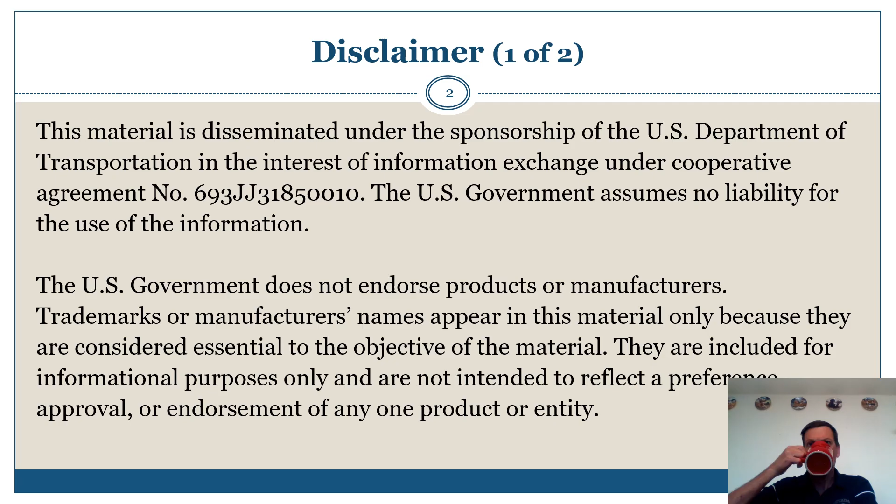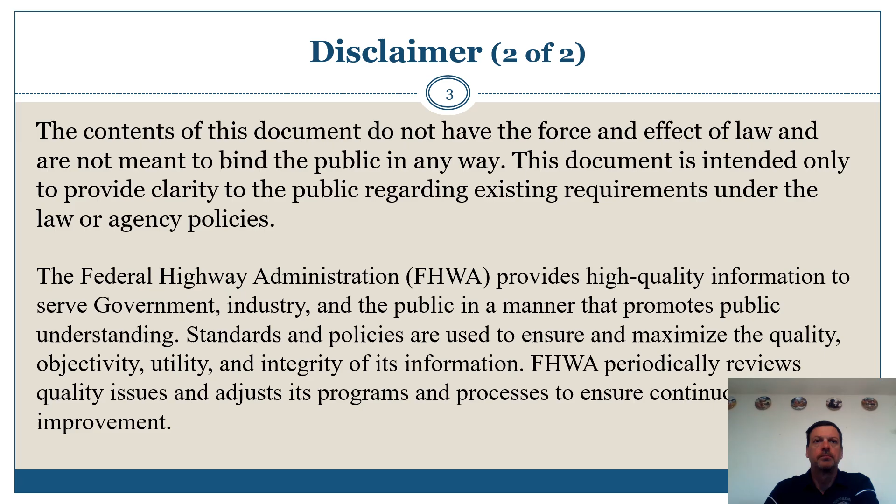Okay, so the outline of the presentation is I'm going to talk a little bit about the cooperative agreement itself and some products, then the Intelligent Construction Equipment Report, as well as some other products that have been developed associated with non-destructive testing technologies that are used in quality assurance programs that FHWA has been working on, and then wrap things up.

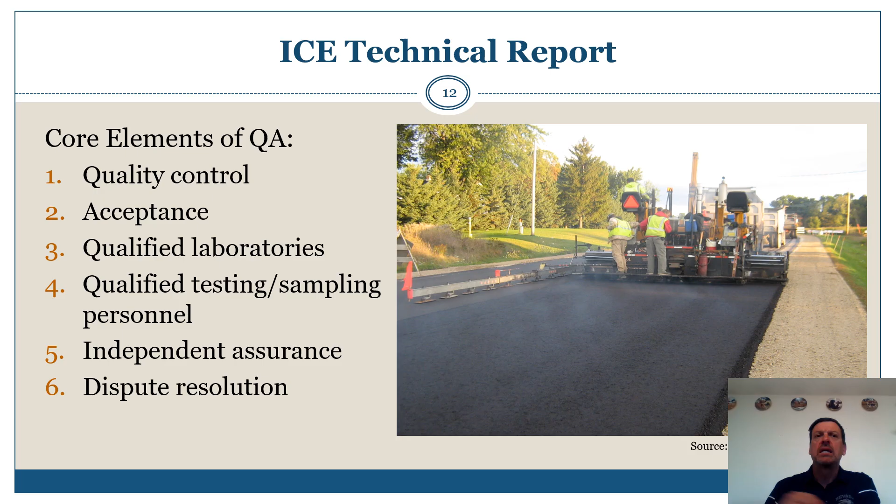And so the first thing we want to do is make sure we get quality control and process control clearly defined. And if you look at the TRB, there's a TRB circular on the definitions, and these are consistent with that, as well as the Code of Federal Regulations.

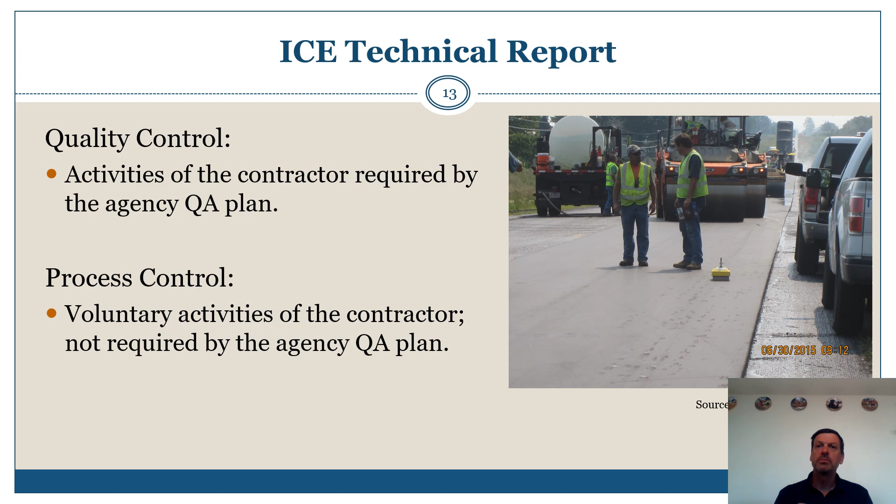Quality control is activities that the contractor does, and they're required by the agency in the quality assurance specification or plan. It's really important to note that these are required and have to be reported. Now, contractors will also do process control. Process control activities would be testing and inspection and so forth that are not required by contract. That's the differentiator that's really important to recognize. Quality control is required; it has to be reported. Process control are things the contractor does on their own, to make sure that the quality control requirements and the acceptance requirements are fulfilled.

Some of the quality assurance challenges when using intelligent construction equipment for acceptance and payment come with validation, and it's really about using the contractor's test results for acceptance. This equipment is maybe mounted on a piece of equipment that a contractor is using, so the contractor is generating the data, and if you recall, the Code of Federal Regulations requires that if an agency is going to use the contractor's data as its basis for acceptance payment, then it has to be validated.

What that requires is that the agency, the DOT for example, would go out and do some testing that could be used to verify that the contractor's data was valid. That's the validation process. For example, with mat density, a contractor might take 10 nuclear density measurements per lot, or 10 cores, and the DOT may take say 3 density measurements, whether by nuclear method or cores, and then those data are put through F&T tests to make sure they have similar means and similar variability. Then we can say they come from the same population, and the agency can use the contractor data in making its decisions on payment.

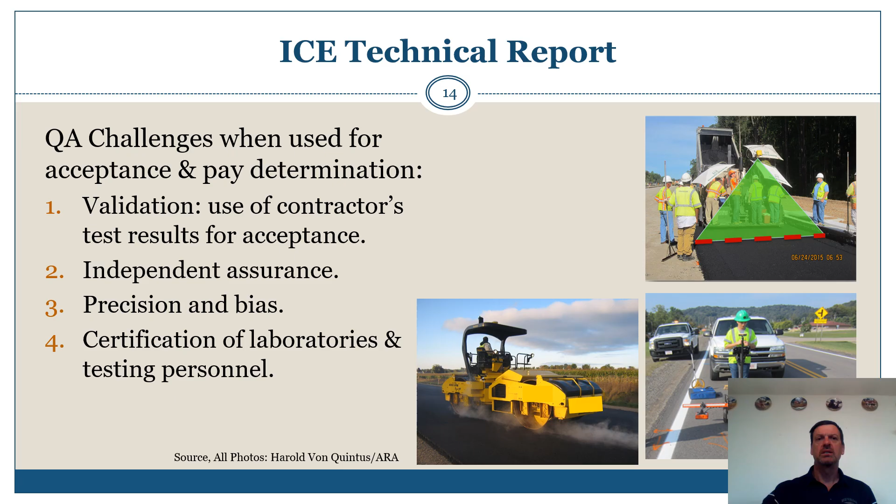We don't have precision bias statements for the actual test methods. Thankfully, we have some new test methods, and precision bias work is ongoing, but we don't have them for each of these ICE technologies. And then, of course, there's certification for laboratories, equipment, and testing personnel.

With any new technology, there are basically 5 steps to complete deployment. You start with the development of a concept, that's step 1. The next step is to develop prototype equipment, then conduct field demonstration - in this example field demonstrations, but it could be field or lab. Once those demonstrations have been done, you can make tweaks to your tools, and then go ahead and get to the pilot or first application of the technology on projects. You repeat that process again, work out some of the things that need to be worked out, and ultimately get to the point where you can develop a specification and standards for full deployment.

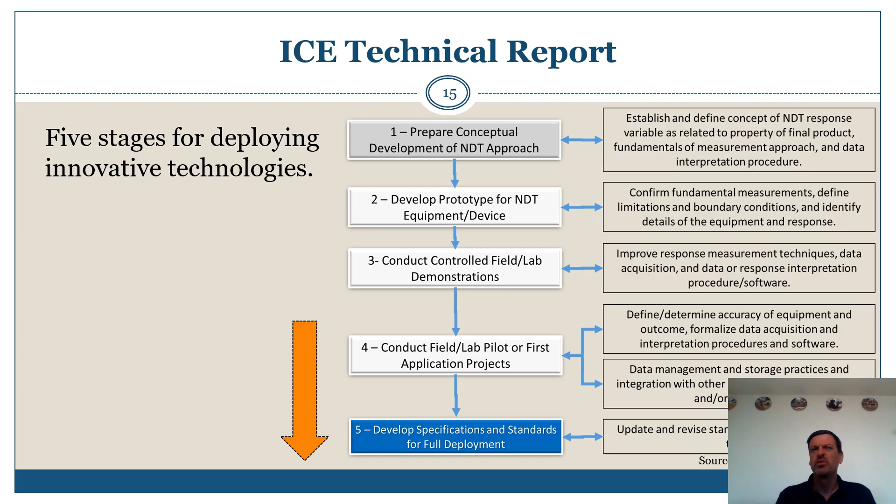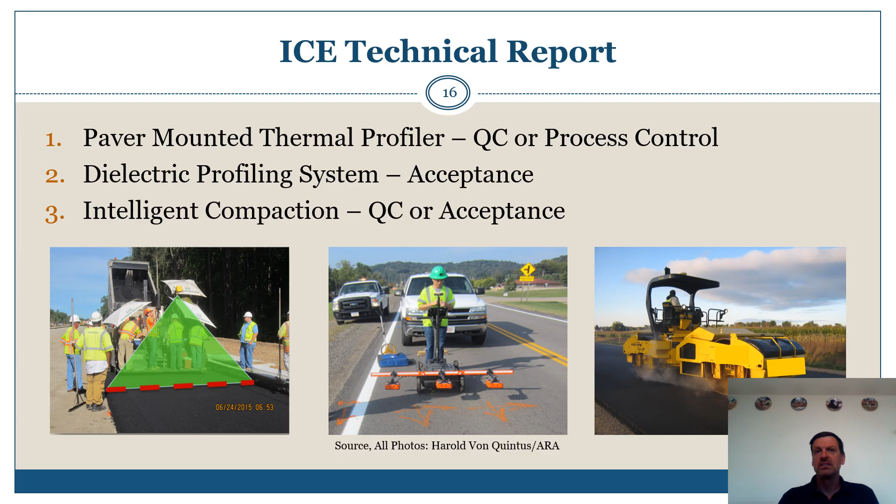With the ICE technology we're going to talk about today, we're really between stages 3 and 5, depending on the technology. We're going to talk about paver-mounted thermal profilers, which thermal imaging folks will call it, dielectric profiling systems or DPS, and intelligent compaction. Following each of these there are some suggested uses for them, and we'll talk about QC and acceptance and some of the challenges, or some of the things that are not challenges, associated with using them for those applications in the webinar.

If we start with intelligent compaction, there's a recently published AASHTO standard, R111. With intelligent compaction, we basically get an estimate of the stiffness or the response of the forces induced by a vibratory roller into the mat. There have been efforts to correlate that to density. What happens is as you make multiple passes with your roller, the pavement structure becomes stiffer, and the idea is as that stiffness increases, you could correlate that stiffness with density. It's been very, very difficult to do that - there are multiple things that affect density.

Basically there's an accelerometer on the vibratory compactor. With that, and a GPS mounted on the compactor, you have spatial information - where is the roller, where's it been on the mat. And again, you get the response from the load that's induced, and you can calculate a stiffness. So as I said, there have been some challenges in correlating that with density.

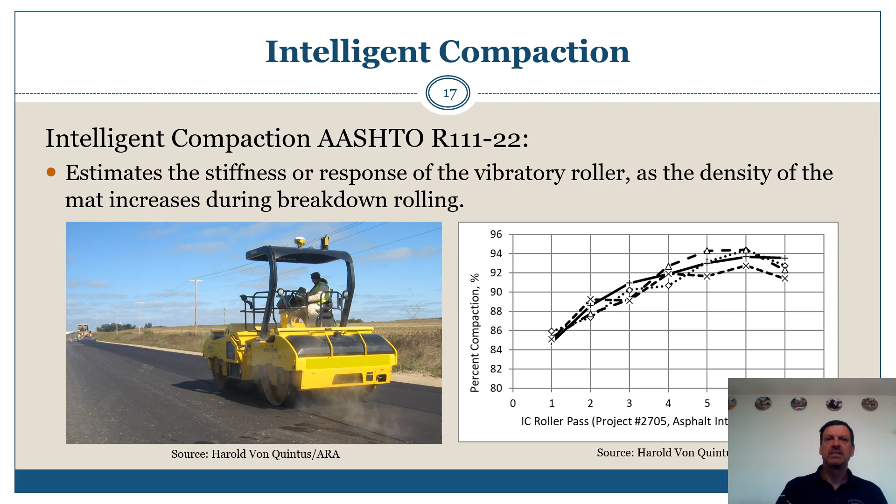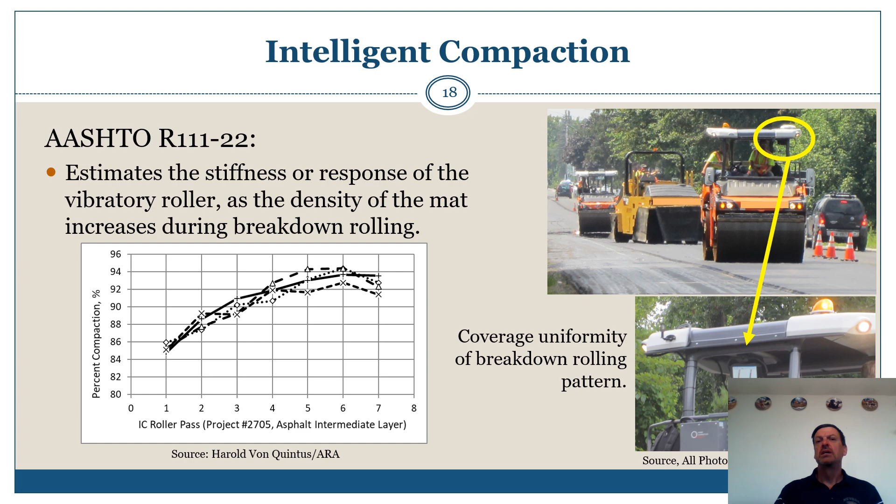This just shows the GPS, and on the rollers the operators have a screen. On that screen they can see it's color-coded, kind of like a heat map. It shows the number of passes they've made on the mat, so they can assure they're getting uniform coverage.

That's a very important aspect of intelligent compaction. Challenges with using it: the agency's not going to go run a compactor after the contractor's done it, so you don't have the validation step, and it really can't be used for payment. There's also some things associated with independent assurance that the loop hasn't been closed on, as well as precision and bias.

We have precision and bias statements with most test methods. You have a precision and bias statement, but we don't have those for these test methods, although there's some ongoing work on that front for some of them. And of course, the training and certification, or fulfilling the qualified technician requirement, is not fulfilled at this point.

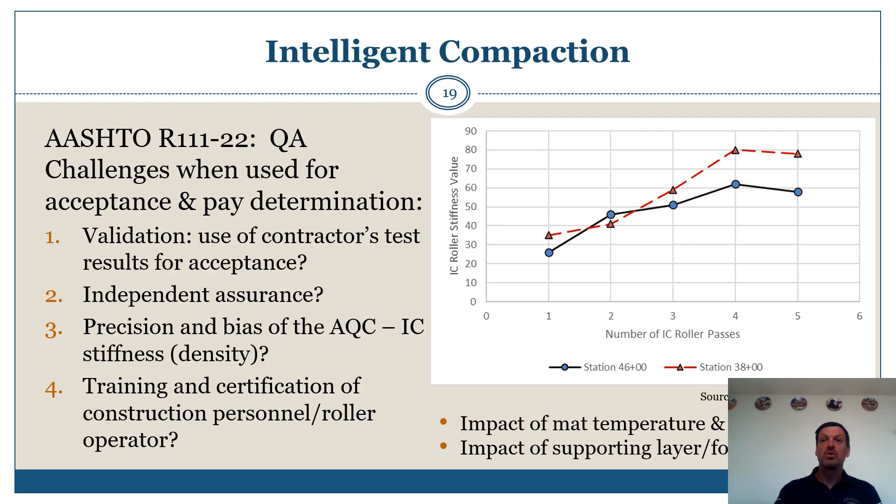Part of the challenge with intelligent compaction is the stiffness of the mat changes as a function of temperature for hot mix. In that process, the density may not be changing, and that's why there's been such a challenge with correlating the stiffness response from the compactor with density. Another reason is that the response is the response of the entire structure, not just the hot mix layer that's been put on top. So that's really the driver as to why we're unable to correlate density well.

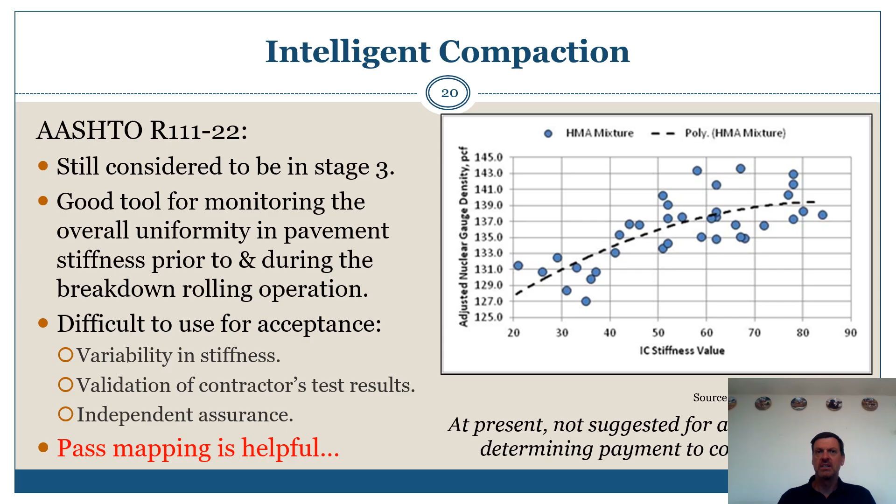So this is still a technology that's considered to be at stage 3. It's a great tool for monitoring number of passes and mapping to make sure good coverage has been completed. It's also a tool to identify, prior to placing your surface lift or the next lift of hot mix, weak spots, utilities, all those kinds of things—variability in the existing mat before you even pave on it.

The next technology I'm going to talk about is a paver-mounted thermal profiler. There's an AASHTO standard for this, AASHTO R110. Basically what we get with the thermal profiler is an estimate of the surface temperature of the mat.

Some work done by the University of Washington—or really by the Washington State DOT, with UW helping them—found that if you have excess ranges or variability in your mat temperature, you're going to have variability in your mat density. That work was done, I think, in the late 90s, if my memory serves me right. So it's not something new, but this is some technology that can help identify the potential for that.

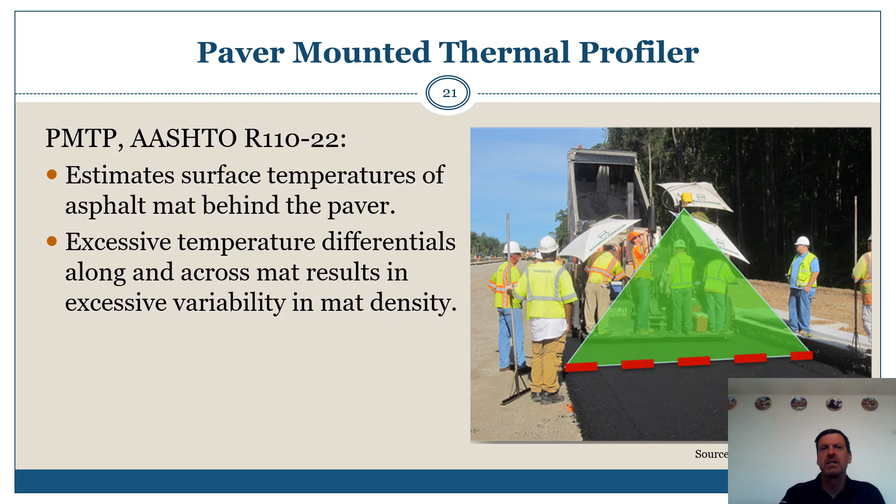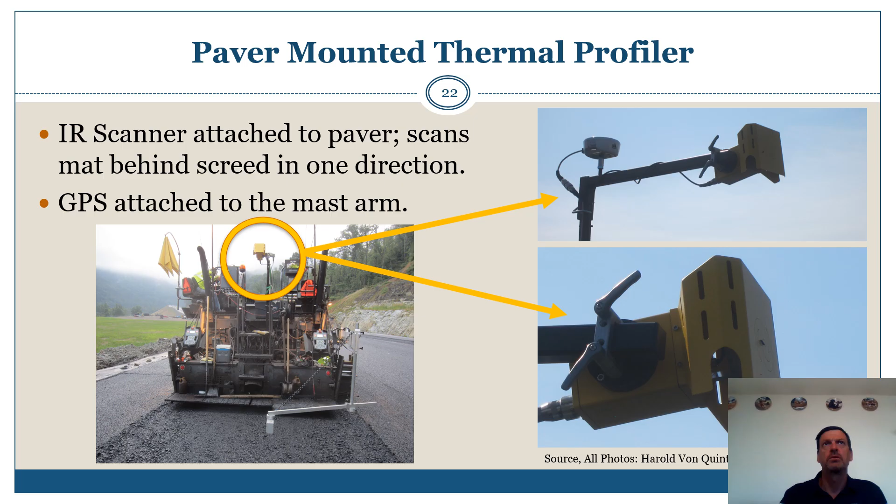Again, it's very simple hardware. On a paver, you basically have a GPS mounted on the paver, and then you have an IR scanner. There are different ways of mounting them. Today, when you buy a new paver, it's not uncommon that these are installed by the factory—they're not sort of aftermarket bolt-ons.

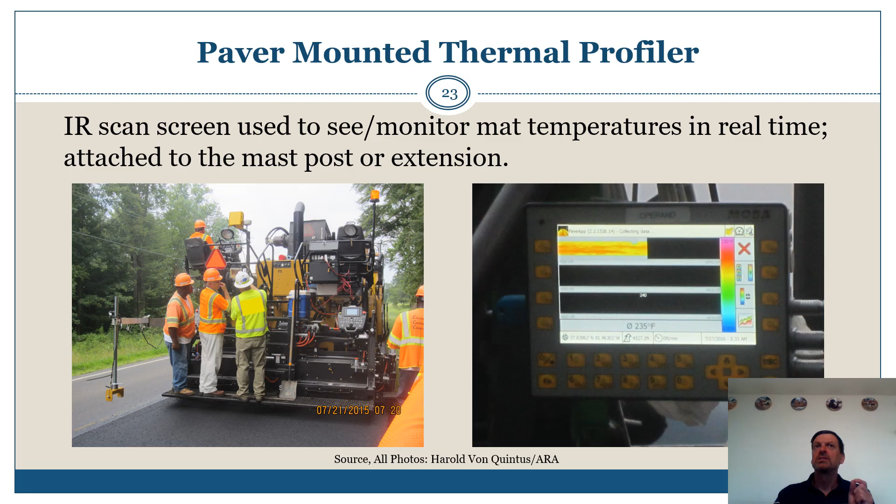The systems all have different manufacturers, and they all have, just like the monitor on the roller, a display so the operator can see the pass coverage. There's a monitor that shows the temperature, the thermal profile, as the paver goes down the road. It's a heat map, color coded, as you see on the right. In this example, the color goes from low temperature blue, and the highest temperatures are up in the purple range. What's really important is not just what the temperature is, but also the uniformity of the temperature—the more consistent the color on the map, the more consistent the mat temperature.

This is just an example of some of the hardware. Again, it's not much to it—it's a simple bolt-on, if you will.

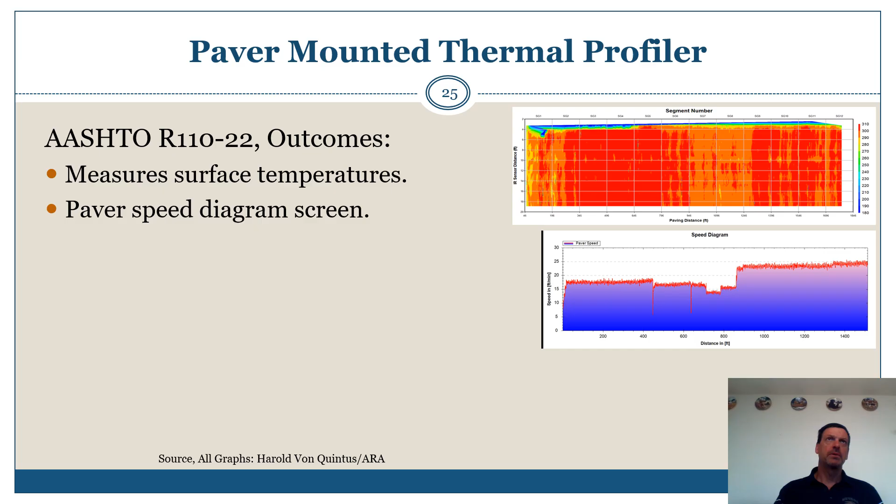This tells you about the operation of the paver, and you can identify stops with this also. We've all been trained that we want our paving operations up and running at a constant pace, so we have a balanced operation and we're feeding enough material to the paver so it never runs dry, and we're going slow enough so that with the compaction equipment we have, we've got adequate opportunity to get it compacted before it cools. Again, this can help operators understand the influence of speed changes on their operations, and ultimately density.

There's basically a histogram, what they call a class diagram screen. You get a distribution of the percentage, or the count which can be converted into a percentage, of temperature observations that are in certain ranges. In this example, you see we've got a handful down at 250. There are about a little over 20% at 270, about 75% at 290, and then there are a few at 310 degrees. So finally, again, we get the map that shows where stops occurred.

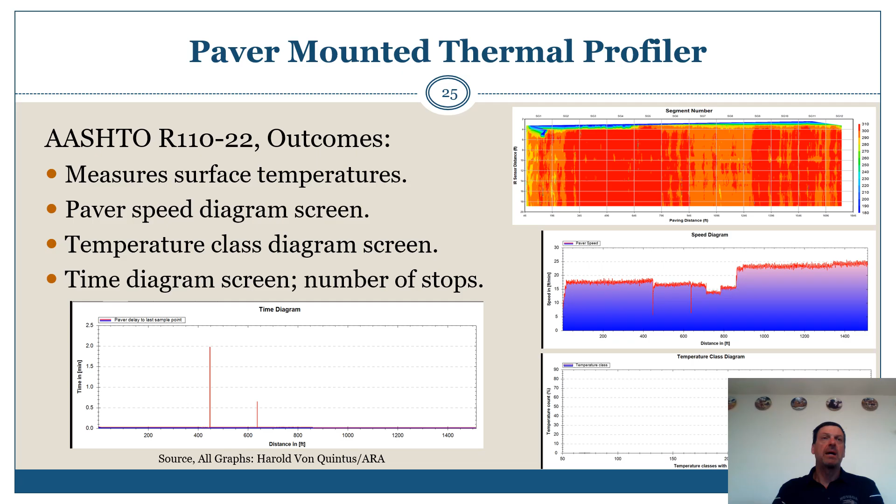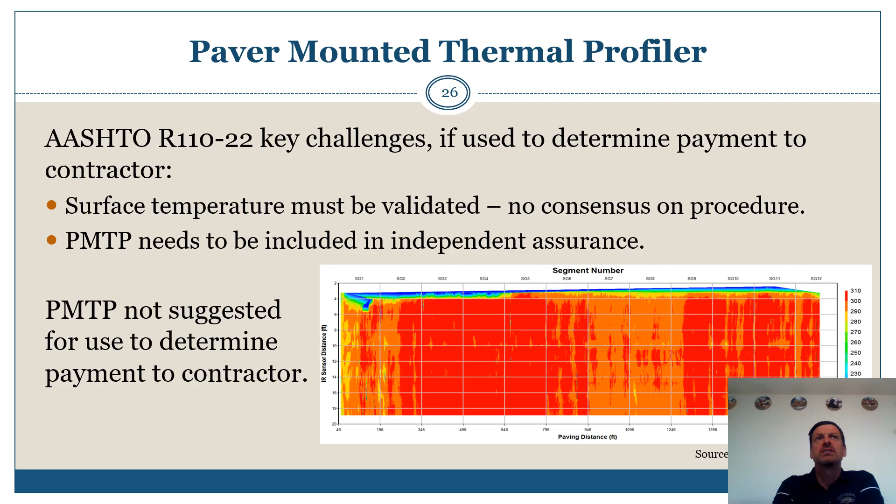The challenges with implementing this technology is the validation. Again, the IR sensor is mounted on a contractor's paver. So for the agency to go ahead and get a heat map, they'd have to do the same thing, right? And so how do they independently do that? That's the real challenge. If they don't get that data, then you can't use it for the verification and validation processes. And so there's really no consensus right now on how to get that data or validate it. We also have some needs associated with independent assurance requirements, and therefore it's not suggested for use for contractor payment at the present.

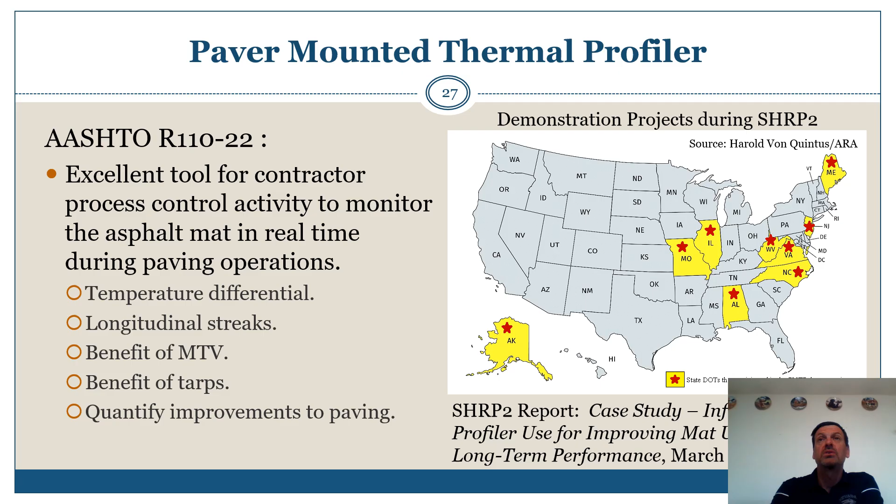The tool was really brought to light through a SHRP2 project that Harold was very much involved in. There's some data we're going to share that illustrates the benefits of this, associated with identifying differentials in temperature, longitudinal streaks. Depending on your paver setup, you can sometimes have streaks in your mat that are at different temperatures. The benefits of using material transfer vehicles, the benefits of tarping, the influence of how you load your trucks, and all that stuff can be used by contractors and agencies to improve the consistency and quality of the mat.

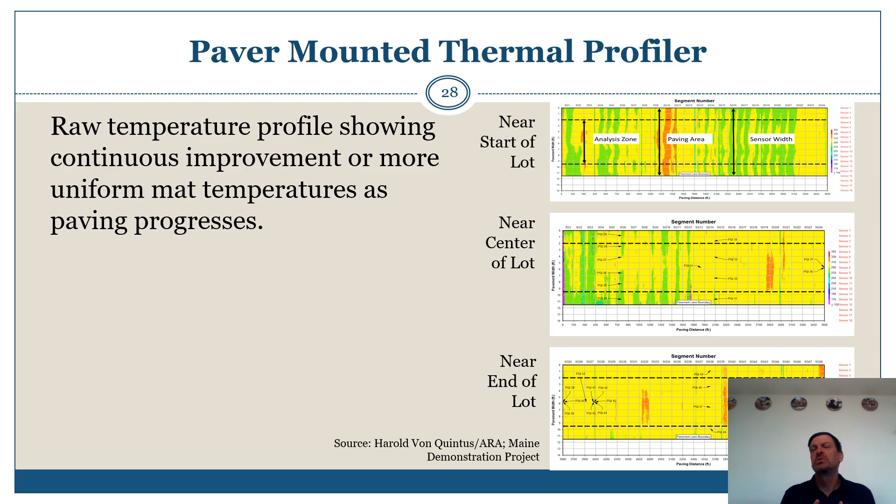This is profile data from a project, and what I want to show here is the heat map. This is the start of a lot, and you see multiple colors here. This is near the center of the lot. We're getting more and more yellow, less orange, less green - again, those are the extremes. Near the end of the lot, it's almost all yellow with a little bit of orange. So this is a transition from relatively high variability in mat temperature to reduced variability in mat temperature, which will lead to more consistent density, which is obviously very important.

This is an example of a contractor using field data, getting it back to the lab in a timely fashion, essentially real time, so they know what's going on at the plant, and the quality control folks can help the plant operations and field folks be successful by using the data.

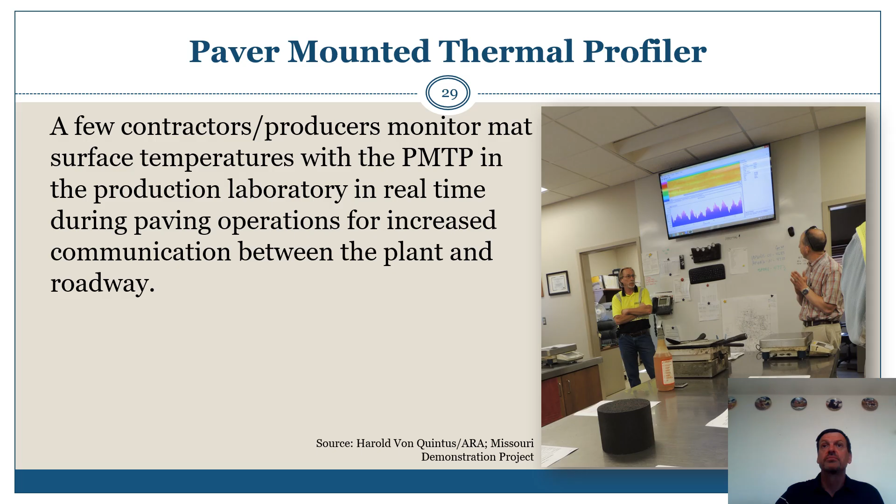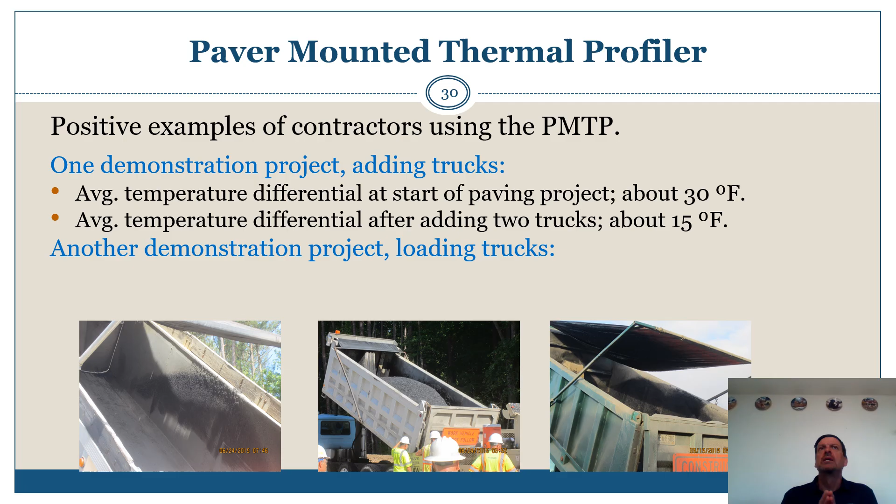So I mentioned a couple of examples on the demonstration project associated with the SHRP2 project. One had to do with trucking, and I talked a little about balancing operations. We got consistent operations, and on one of the demonstration projects, they added some trucks, and by adding trucks they significantly reduced what are called temperature differentials - I'll talk about quantifying those in a minute. So the range of temperatures on the mat went from about 30 degrees Fahrenheit down to about 15 degrees Fahrenheit. Another example was associated with loading trucks - loading in one drop versus multiple drops, with the multiple drop technique having more consistent temperatures of your mix on the mat.

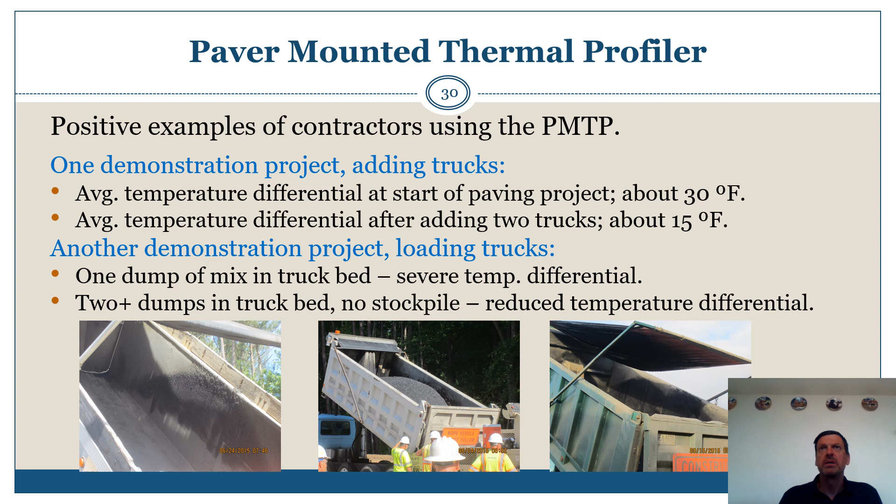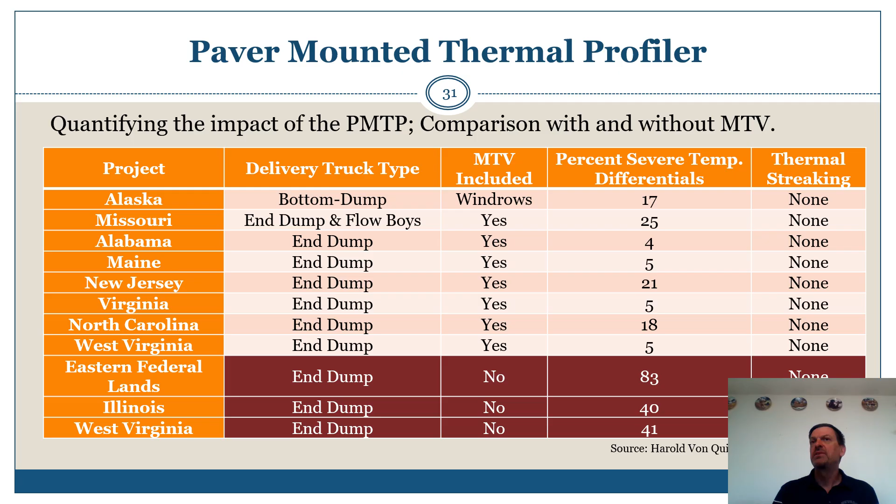This is a project there where there were bottom dumps and a windrow. When you have a windrow, you have to use a windrow elevator or pickup machine or a coal cow, pick your terminology, to get the mix into the paver. On that project, and there's only one of them, so it's a little hard to make any real strong comparison here, but it does illustrate that even with bottom dumps and windrows, not an MTV, you can still pave and have mats with a relatively low percentage of severe temperature differentials, which is illustrated. So really what that says to me is that if you're doing the right things in your paving operations and you're using the right tools, you don't necessarily have to have an MTV to get consistent mat temperatures.

So with the thermal mounted, or the paver mounted thermal profiler, it's not used for acceptance. It's again a great tool for monitoring paving operations and making corrective action. There's so many examples of that, and I'll wrap up with some of that in the end.

So some of the challenges are obviously with the laboratory and personnel qualifications. Think about these lab qualifications. If you pick a lab test, say theoretical maximum specific gravity, you've got a pycnometer and a shaker table, and you've got a manometer, and you have balances that you use, and you have a calibration service come in, and they verify the performance of the equipment and give you records and all that good stuff. Well, that's not going on out in the field with this equipment. This equipment is mounted on a paver, and so we just don't have some of the systems in place to make sure we meet the independent assurance in laboratory, what would traditionally have been called laboratory and personnel qualification requirements. Because you have to make sure that the sensors are working properly, and you have to go through a process of calibrating them and then verifying them at a given frequency. Again, that's just not really worked out just yet.

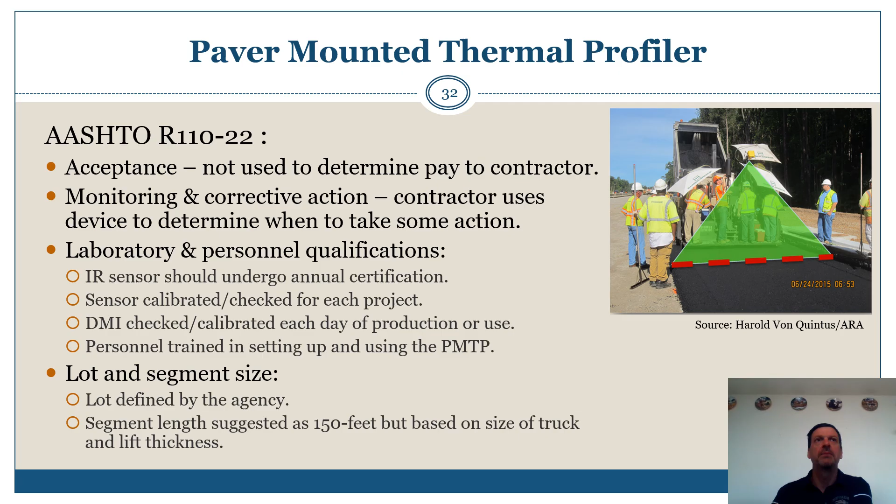What was an outcome of the SHRP 2 project was a recommendation on defining segments, as the distance that a single truck covers. The reason for this is when you're looking at this data from truck to truck, you're not looking within a truck. You're obviously going to see more, you have the potential to see more variability. But you're not really looking at the control within a truck, which really matters, assuming that the plant produces a mix at the same temperature and all that good stuff and gets loaded the same. So that was one of the recommendations.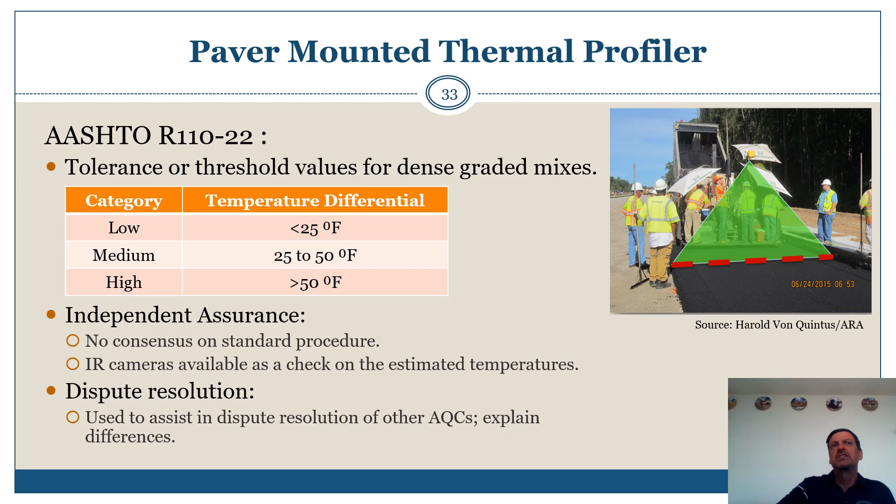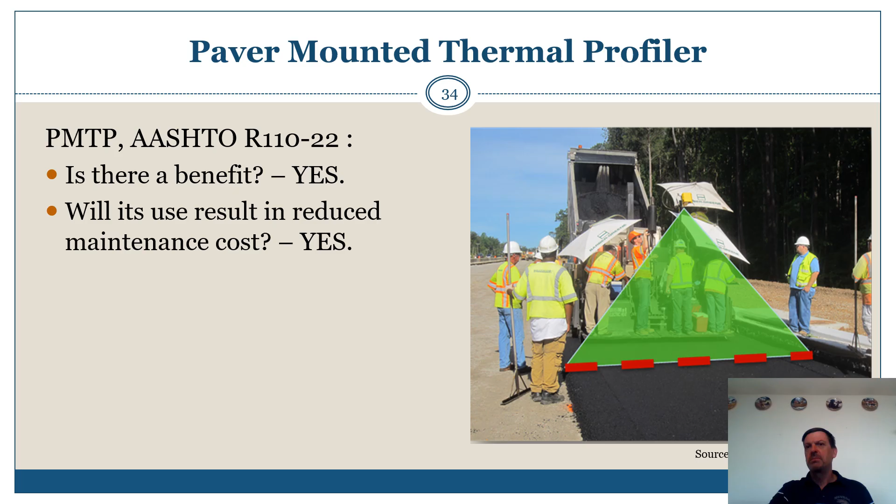And I already talked about the independent assurance items, and then finally the dispute resolution. Again, this is a tool that can be used to help dispute resolution. So the questions posed, is there benefit? Obviously, yes. Will it result in reduced maintenance costs, more consistent mats, all that good stuff? The answers are yes, yes, yes. And then a follow-up question is, why aren't more contractors using them?

As there are some contractors, I should first start by saying that there are some contractors that are using them and using them successfully.

The other piece of that is contractors have businesses, and so if they're going to make an investment in this technology, they've got to buy the equipment. They've got to have people monitoring the data constantly, putting all that data up in the cloud, storing it, analyzing it, and then using it for training. That all costs money. So if there's not an incentive to do that, some contractors may not do it.

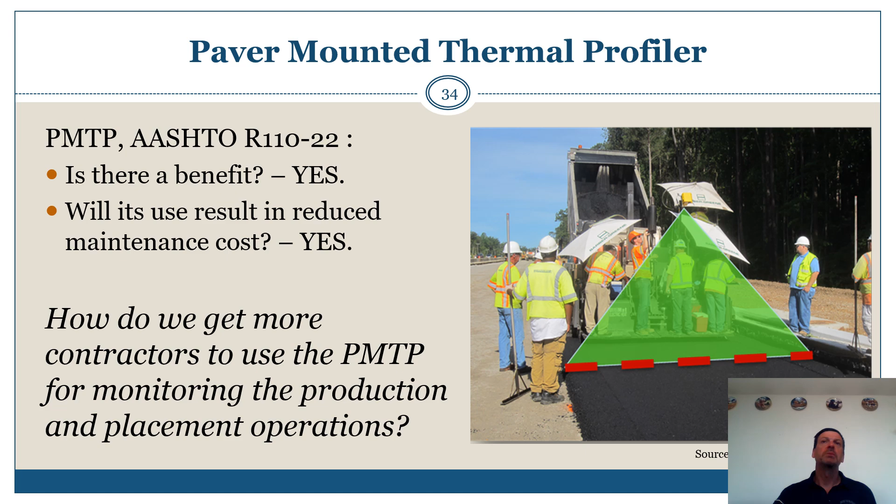The next technology I'm going to talk about is a dielectric profiling system, or DPS. Some of you may have heard it referred to as GPR, ground penetrating radar.

Basically what the DPS is, there's an example in the picture on the right. What's typically being done today is you've got a cart with 3 sensors mounted on it, the orange boxes on the cart, and the cart is walked down the mat.

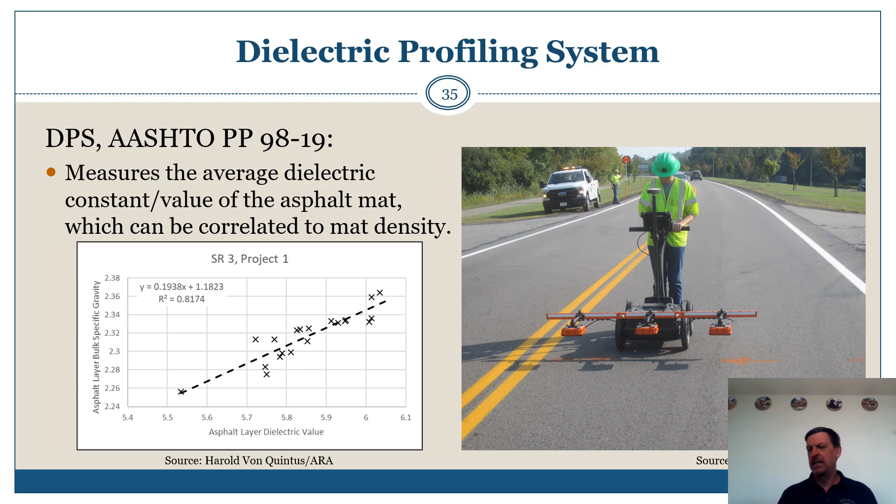Each of those sensors gives you a dielectric constant. We don't have time to get into the details, but essentially you get a dielectric constant from each sensor, and then you can correlate that dielectric constant with density, with bulk specific gravity, with percent compaction, or with percent air voids. It doesn't matter which one you want. The point is, you get a dielectric constant, and then you correlate that with density.

One of the really good things about this is you can get full mat coverage. So rather than taking 10 density measurements with a nuclear gauge, or the state taking 3 or 10 cores and 3 cores for the contractor and state, or 10 nukes and 3 nukes, you can get complete coverage. So you can get a measure of conformance rather than an estimate.

When we take a limited number of samples, most specifications take a limited number of samples, say the contractor taking 10, agency taking 3. The F&T tests are then used to verify that the means and variability of the data are similar. If they are, then the contractor data, which is a bigger data set, is typically used to calculate a percent within limits, which is an estimate of the percent within limits based on a sample, and it has some risk associated with it.

Really, all that is eliminated if you get complete mat coverage. At that point you know everything about the mat, and all you have to do is look for how much doesn't conform. There's no estimating from a sample, which again has some risk associated with it.

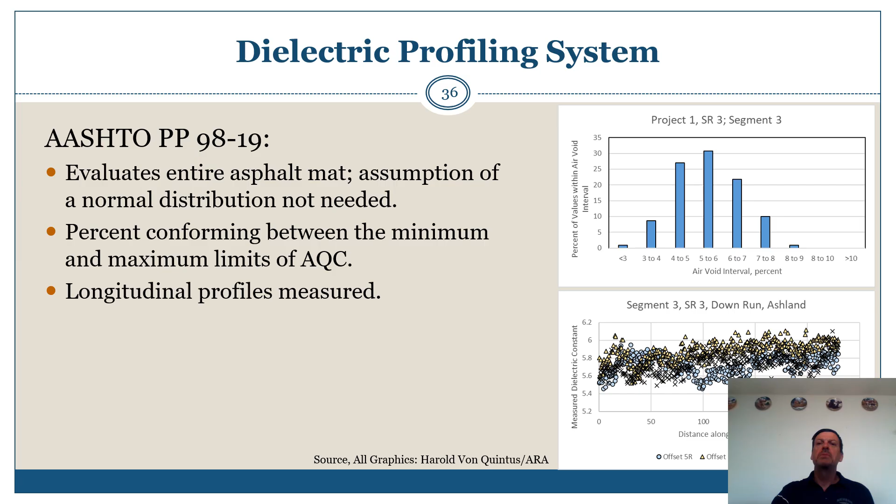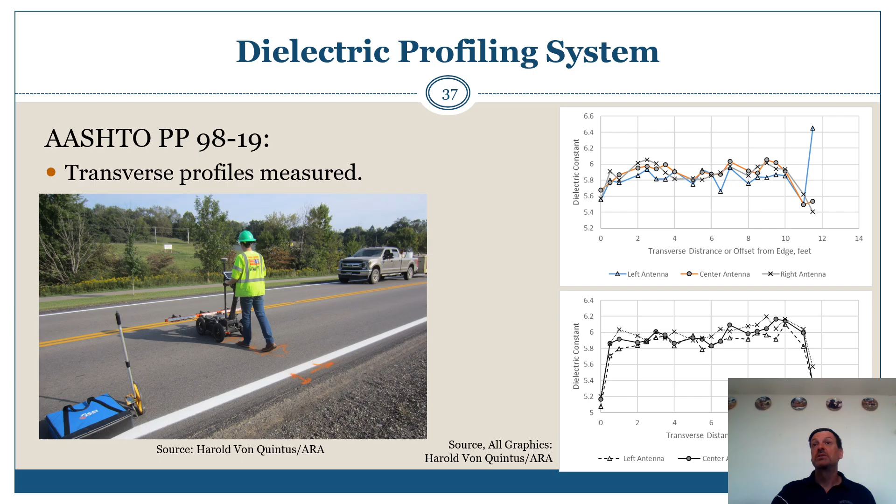You can also use it to measure density transversely. Again, this is a really good tool for pavers, for paving operations, to understand how the way they've got their paver set up and how they're operating it can influence density, as well as the compaction process.

This slide shows correlations between dielectric constant. On the x-axis you have asphalt layer dielectric value. On the y-axis you've got bulk specific gravity, and with a theoretical maximum specific gravity you could turn that into density or air voids.

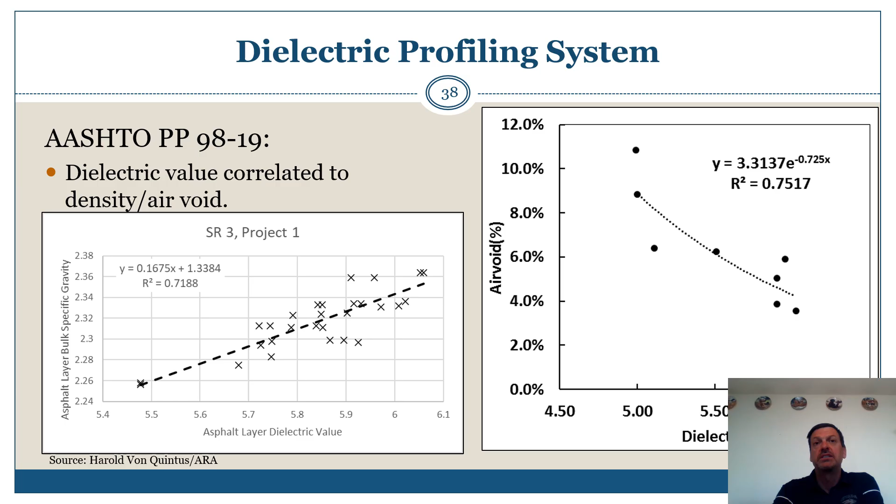You see the correlations on these plots in the 0.7 to 0.75 range, and these are basically from correlating dielectric values from the GPR or DPS to field cores.

Now there is a lot of variability that can occur in production. So you have temperature gradients, for example. You have inconsistency in mix. You have the distribution of the mix with the paver and how that could influence all of this. At the end of the day, there's a fair amount of variability in the field that doesn't exist in the lab, and that became an important future observation for future use.

So the things that influence the dielectric in the field are whether or not the mat has any moisture on it. It has to be dry. The dielectric is significantly influenced by moisture, so the mat has to be dry. It's not real-time density, it's when the mat's dry, but in most operations it's pretty quick after the mat has been finished compacted. And then the thickness of the mat, as well as the gradient of the density in the mat itself.

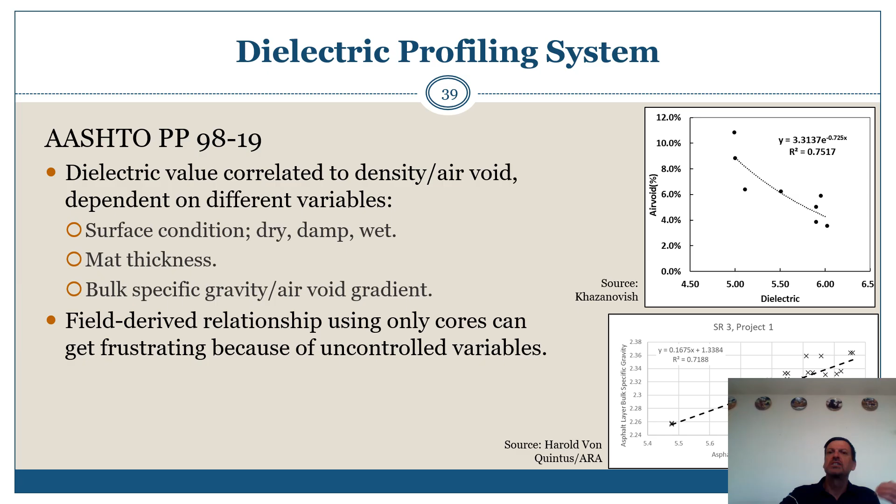So the variability associated with that has created some challenges with getting really good correlations—getting above about a 0.75. Now there's some rare cases where it's better than that.

So what has been learned—there's been a lot of work done associated with the pool fund study that Minnesota is the lead on. There's a DPS ETG, and I think there are well over 20, close to 30 states that are participating. One of the outcomes of that is using laboratory compacted specimens to develop the correlation between density or air voids and dielectric value, rather than field cores, to address the fact that there's so much more variability in the field when you're really trying to get an indication of the density.

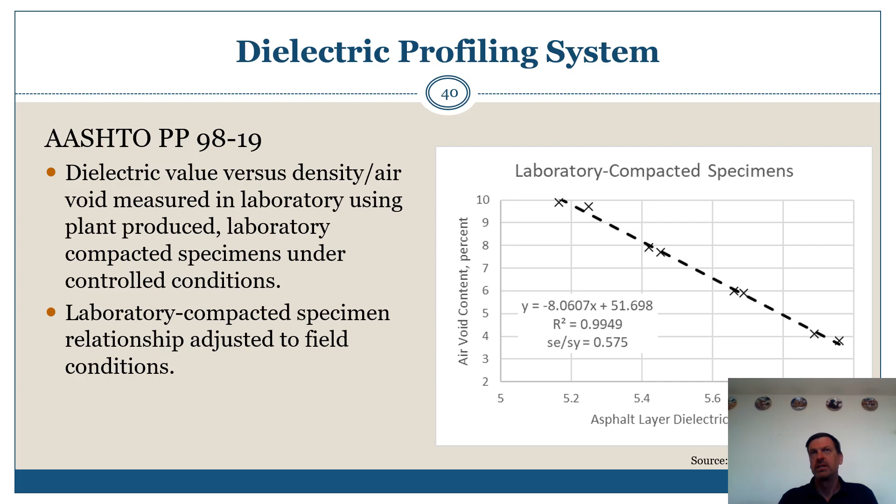So we see here an example of a correlation that's 0.99—fantastic correlation, right? This is what's being used today or promoted today. This is an example of some data with cores that were measured, so it's volumetric air voids, cores that were calculated using bulk density and RICE, and then lab compacted specimens. And you see pretty good correlations among them, again R-squared values that are very, very high.

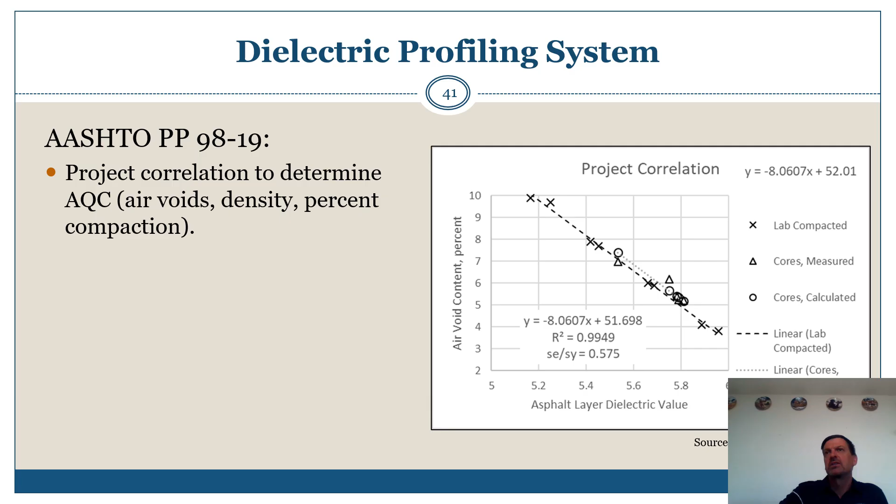But most folks have begun to move to using lab specimens to eliminate those other sources of variability and get better correlations. So there's a provisional standard for the DPS.

Obviously there's some challenges when using it associated with acceptance and payment. Again, this is one of those where if the contractor goes out there and runs the DPS over the mat, gets all the data, the agency has to use some method to verify that, whether it's cores or running a DPS on a portion of what the contractor ran it on. So it's not recommended right now for use for acceptance because of that process.

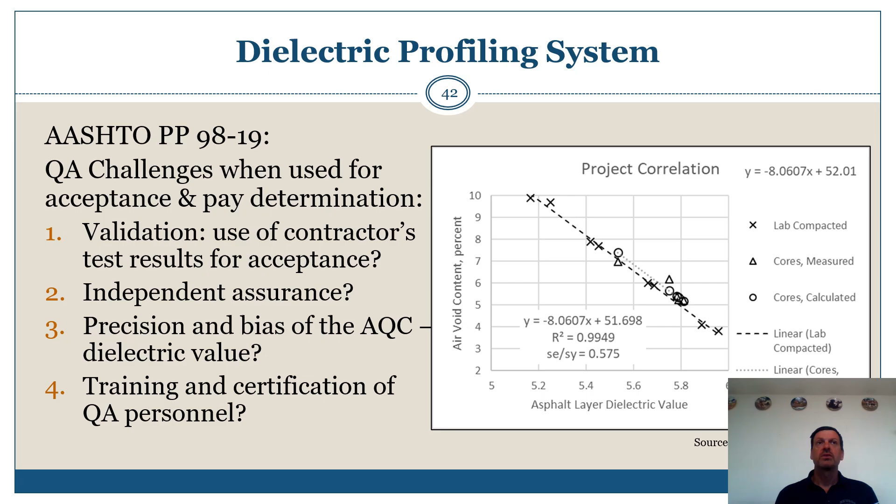We still have some things on the independent assurance to get worked out. There's work going on with precision and bias, which is really good. And then again, training and certification for quality assurance personnel is still something that's sort of hanging out there. A lot of this is being worked on in that pool fund study. I want to underscore all the really good work that's been done on that, and FHWA has been supportive of it.

So the tool is a really good tool. The DPS is a good tool for estimating mat density, and again you get the complete coverage. We can correlate it with density. We can use it longitudinally or transversely.

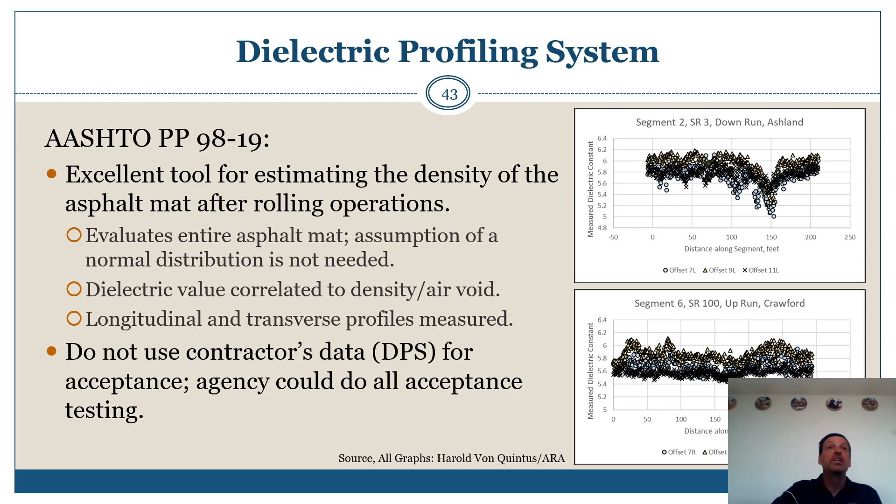The one thing that states or agencies could do is perform these measurements themselves rather than having the contractor do it, and then use it for acceptance. I think it's a great QC tool and a great training tool.

I've been on projects where contractors have used these technologies—all three of them: intelligent compaction, thermal profiling, and DPS—collectively to understand problems. And again, they're great tools for changing processes and for training, in my opinion.

And I've already sort of beat this to death. With a lot of these technologies, we have the laboratory and personnel qualification requirements that we need to get worked out. Again, it's different than what we've had in our historical quality assurance programs, where we're really focused on labs. We got it out in the field.

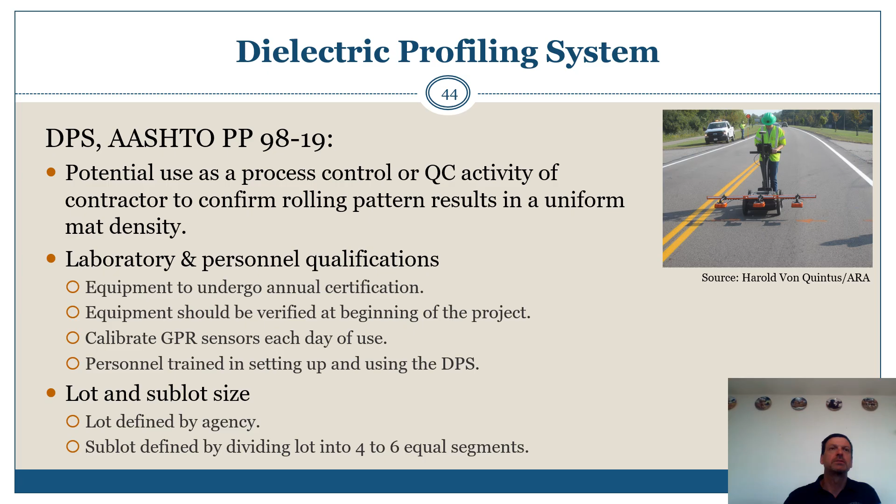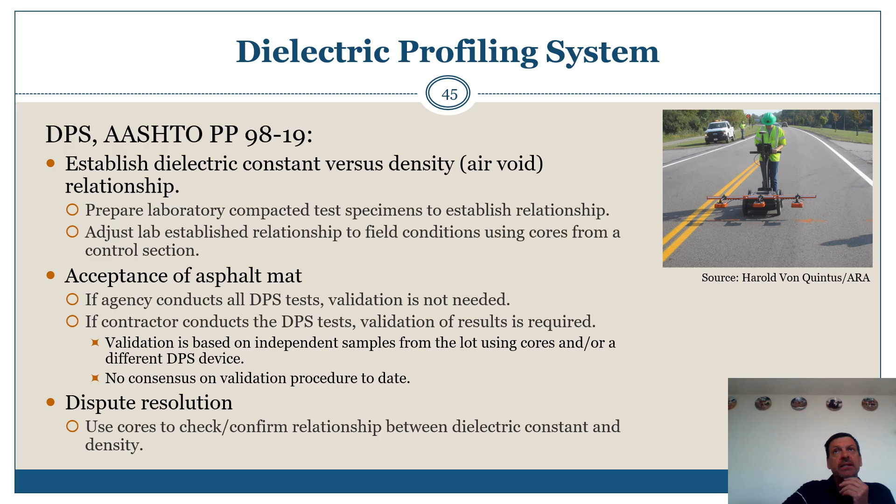We can establish relationships between density and dielectric value, and it's again a very good tool, and it has been used to help with some dispute resolution stuff also to date. So is there a benefit?

Obviously the answer is yes. Will its use result in more accurate decisions? Well, because we have the potential to measure the whole mat rather than just spot sample tests, obviously the answer to that is yes.

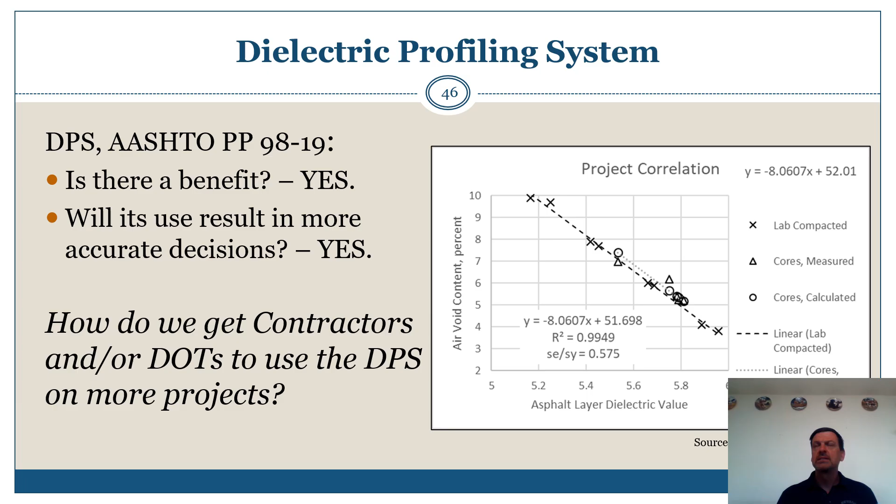So again, the question is how do we get contractors to use it? And I think the answer is really the same, right? They have to find a benefit in it, whether it's improving their pay factors on PWL projects, or getting materials accepted that they've historically had challenges with.

And again, the pool fund study, a lot of work has been done that I think is going to help us continue to get to the point where more and more contractors use it.

In wrapping up, I'm going to cover a couple of other things that have been going on with FHWA associated with using non-destructive technologies in quality assurance programs.

One is the quality in the asphalt paving process. The Mobile Asphalt Technology Center, which some of you may remember as the mobile asphalt labs, or the binder and mix portable labs, will do these quality in the asphalt paving process workshops. They cover quality assurance concepts and positive practices for handling, testing, inspecting, and paving processes, including the DPS, thermal profile, and other field devices.

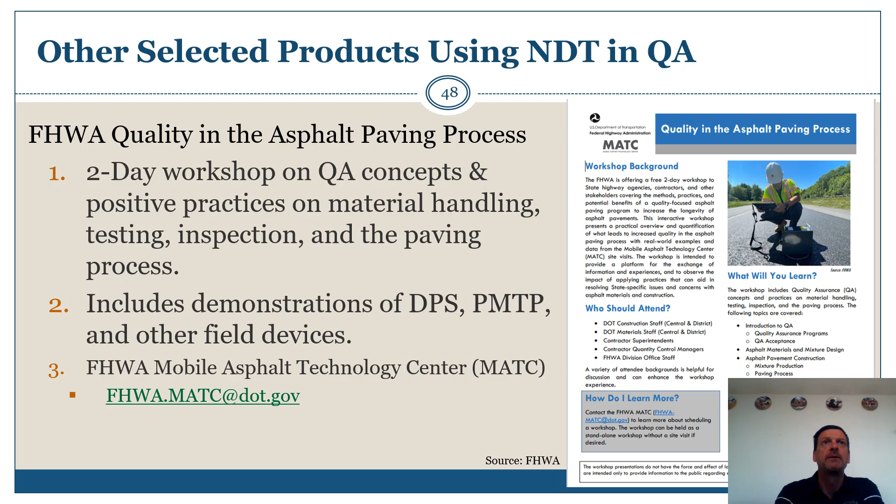There's one for thickness in there also. You can find the document - I apologize, I thought I had the URL on this page - this document is a write-up about the quality in the asphalt paving processes. You can find that at the FHWA website.

They're also doing spotlights on pavement uniformity. They've done one on the thermal profiler and one on the DPS, and they've got spotlight on pavement uniformity documents that are examples of where different states have gone out and used them, and what their experiences were. Again, you can find those on the FHWA website.

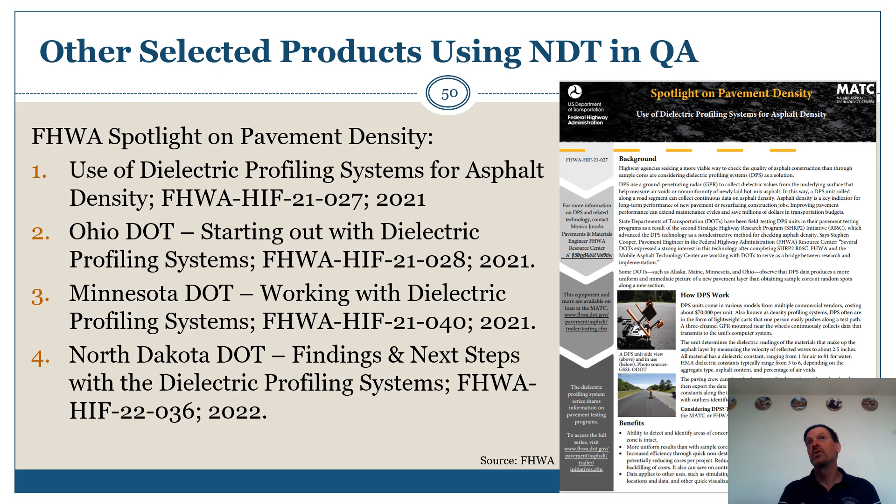So this is the stuff associated with thermal profiler, and these are examples associated with the dielectric profiling system. Again, it's good examples of using the tools to improve quality. Obviously, if we improve consistency and quality, we're going to get better performance, and in the long run, it's going to save agencies and taxpayers dollars.

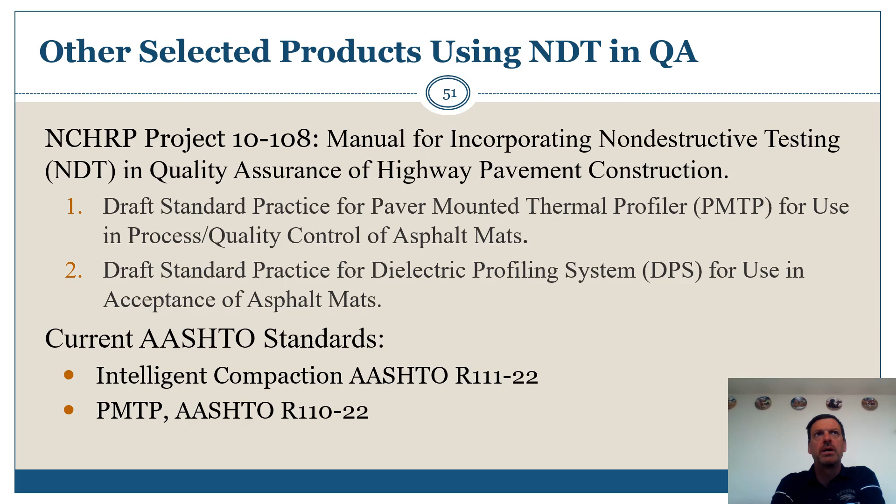The last thing I'll talk about here is NCHRP Project 10-108. From that, a manual for incorporating non-destructive testing into quality assurance programs was developed. Some draft standards came out of that, and some of those have transitioned to current standards - the one for intelligent compaction, as well as the one for the paver-mounted thermal profiler. And we talked about AASHTO 111 and 110.

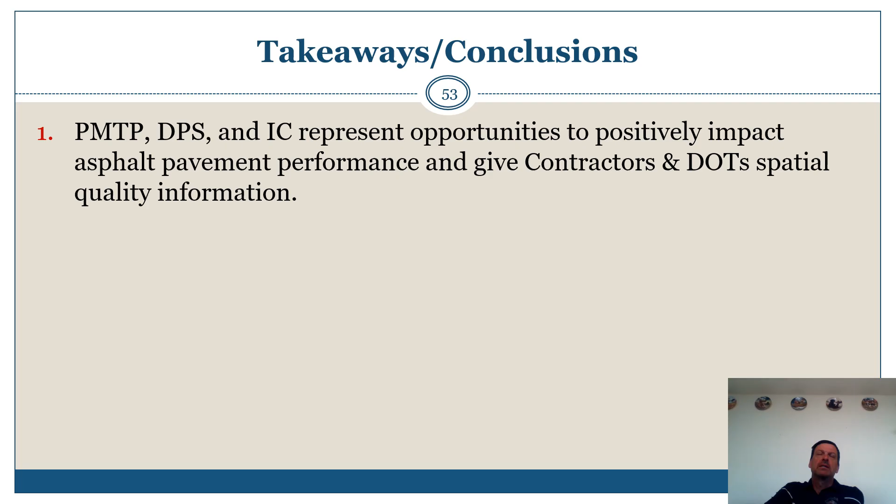So as far as takeaways go, these technologies represent opportunities to positively impact asphalt pavement performance and give contractors and DOTs spatial quality information. The thermal profiler evaluates the uniformity and magnitude of temperature variation in real time behind the mat - that's the surface temperature. The DPS evaluates the uniformity and magnitude of the asphalt mat density after compaction.

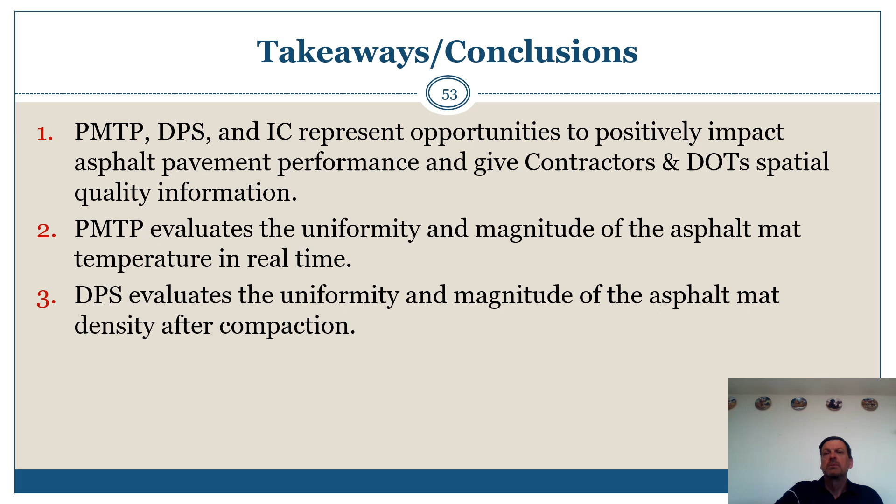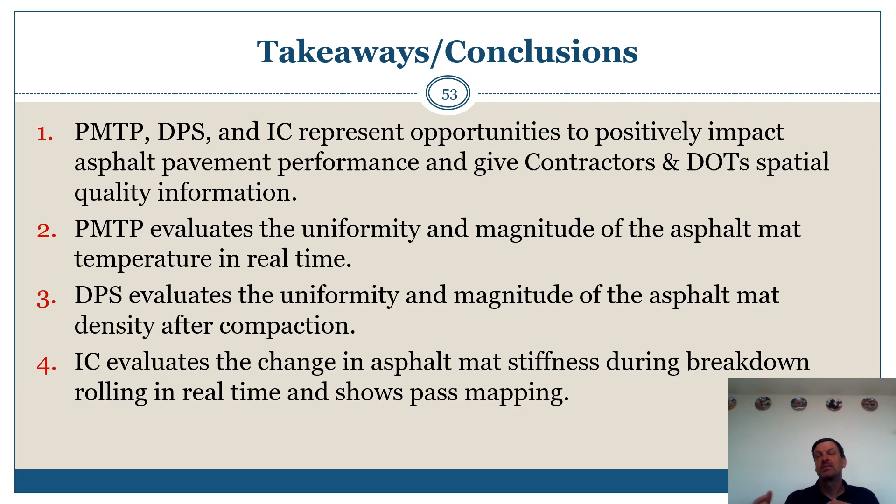Again, it's not real time, but it can happen very quickly after completion of paving, although it takes some time to analyze the data. Then intelligent compaction evaluates the change in asphalt mat stiffness during rolling as a function of time. It also shows pass mapping, and I personally think that's a really, really good feature from a QC perspective or a process control perspective.

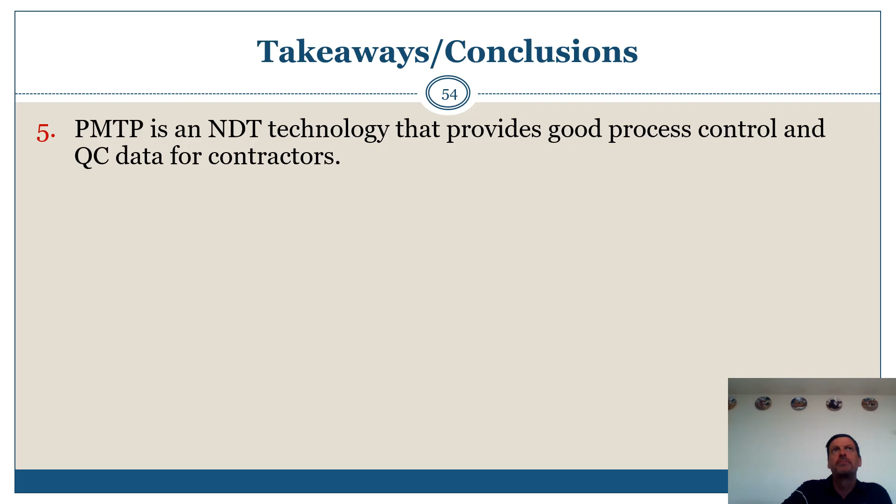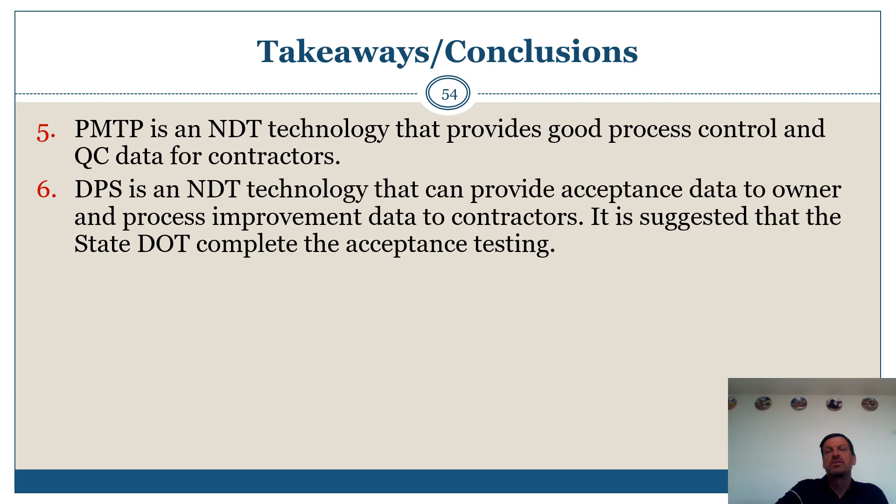Thermal profile is a non-destructive technology that provides good process control and QC data. The DPS is again an NDT that can provide acceptance data to owners if they make the measurements - DOTs could make those measurements themselves that could be used for acceptance. Contractors can use it for process control and learning and training. IC requires quite a bit more work to get to the point where it could be used for acceptance.

Combining these techniques can be really powerful. To that point, there was a workshop at TRB last January on this topic, and then there was a webinar associated with it done in May of 2023, called Real-Time Quality Control with DPS and PMTP. The folks that did that included two contractors who presented at the workshop, presenting examples of using the technologies and coupling two or three of them very successfully to improve operations and resolve problems. This is a URL to the recording of that webinar, and I would really encourage you to go take a look at that.

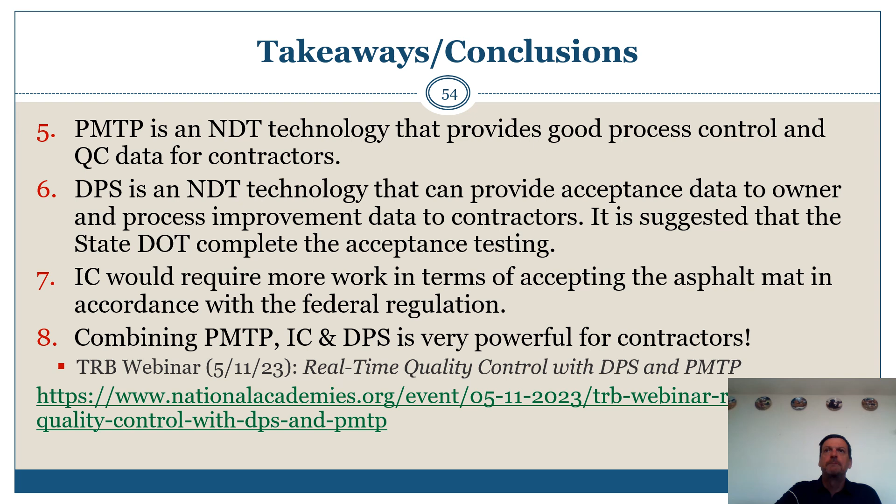It talks about some of the things we've talked about today, as well as demonstrating some examples presented by contractors using the technologies.